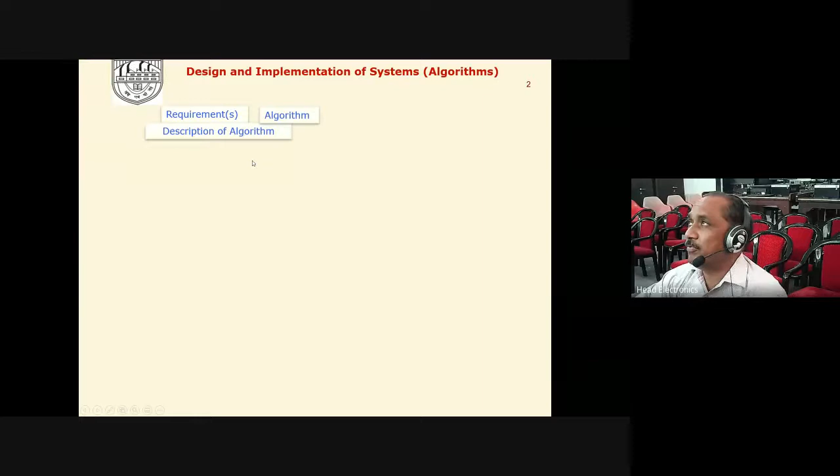So as we have described the four C's related to electronics, again there are four parameters that will be considered in order to analyze the performance of the system. The first step is the requirement, and requirements are always in ideal form, and from those requirements we will develop the algorithm or the concept. If it is more important to specify the functionality of the system or algorithm than the order and structure of the internal operations, then it is described using mathematical formulation, or mathematical modeling, and it is done at the higher level.

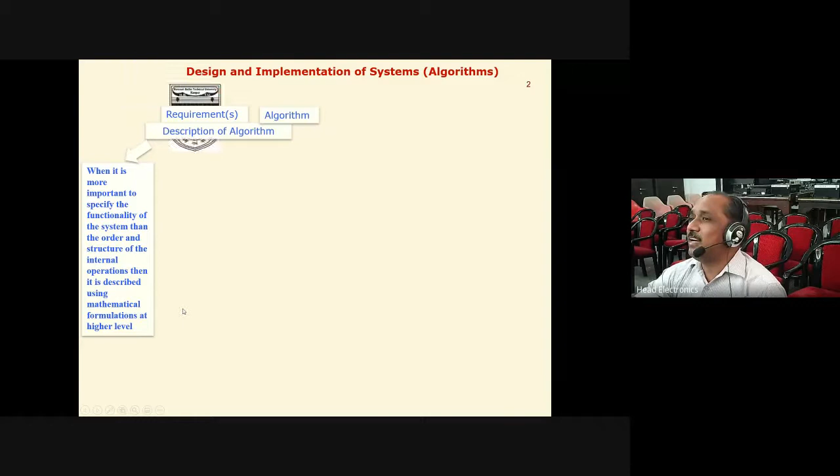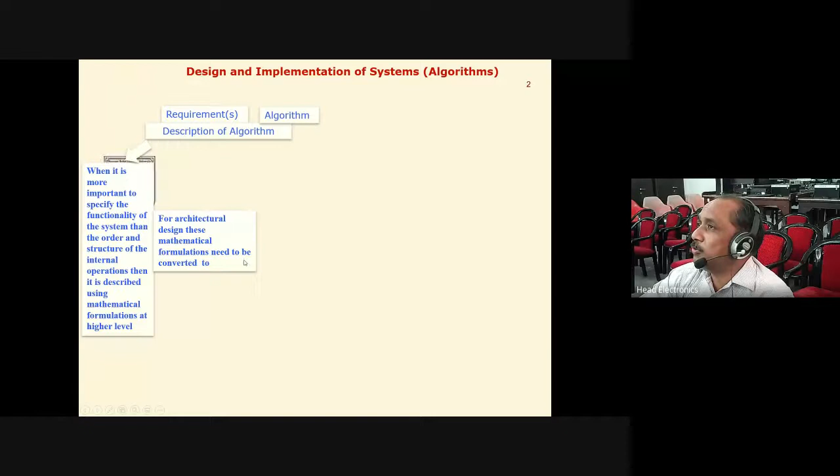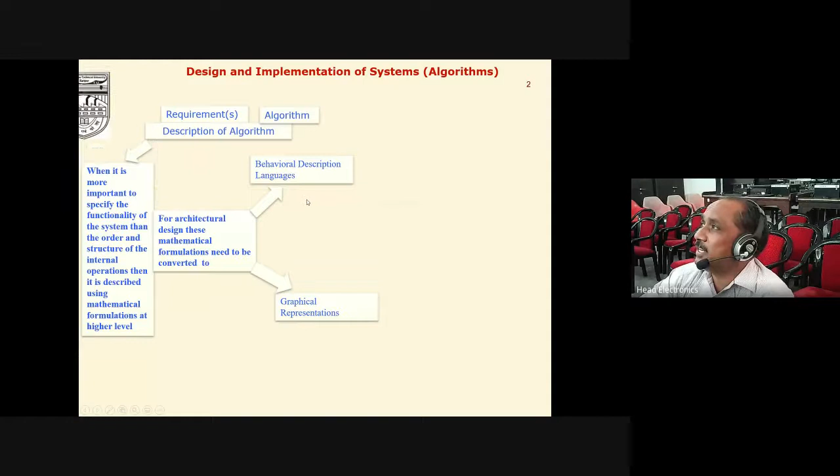But for the architectural design, these mathematical formulations need to be converted using behavioral description languages or graphical representation. Behavioral description languages can be categorized into three categories: prescriptive languages, descriptive languages, and applicative languages. A prescriptive language explicitly specifies the order of the assignment statements, and an example of this type of language is C.

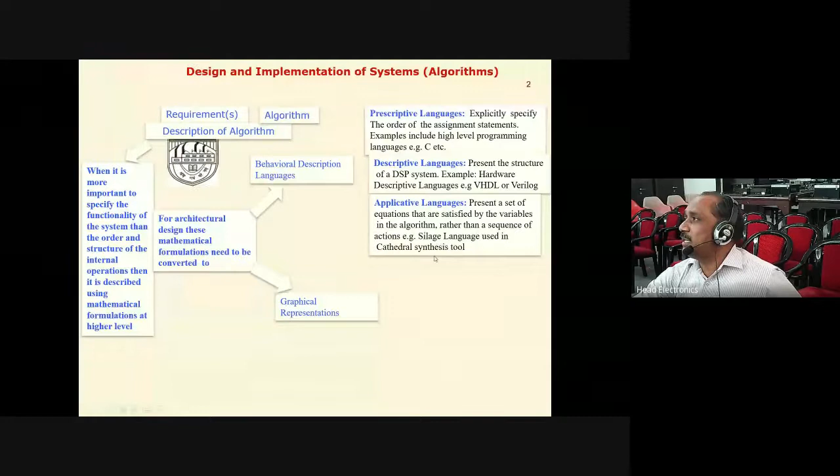Descriptive languages present the structure of the algorithm. For example, for a DSP algorithm, this will describe the structure of the DSP algorithm or system. For example, HDL, VHDL or Verilog fall under the category of descriptive languages. The third one is the applicative language. It presents a set of equations that are satisfied by the variables in the algorithm rather than a sequence of actions. For example, the Silage language is used in the Cathedral synthesis tool, or MATLAB may also be considered an applicative language.

Now, for the graphical representation, we can use different types of graphics. Why do we use graphical representation? Because graphical representations are efficient for investigating and analyzing data flow properties of DSP algorithms, and for exploiting inherent parallelism among different subtasks. Due to parallelism, the speed will be enhanced, and the power consumption will also be affected. And graphical representations can be used to map the DSP algorithm to hardware implementation.

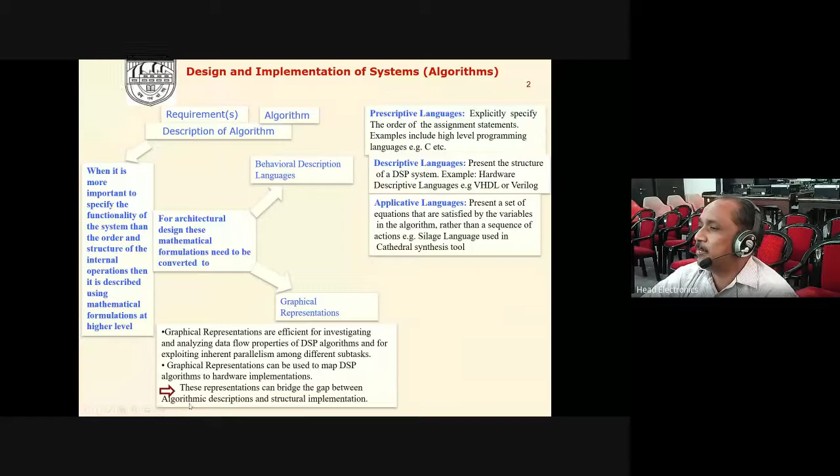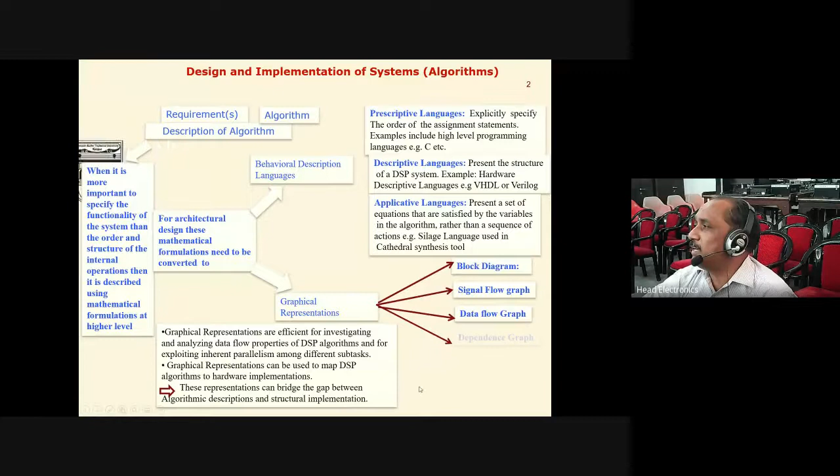The third point is that these representations can bridge the gap between algorithmic description and structural implementation, because there is a large gap between designing the algorithm and the implementation. For graphical representation, we can use the block diagram, which describes the hardware architecture. The signal flow graph gives information about the flow of the signal. The data flow graph describes one iteration of an algorithm, and the fourth one is the dependence graph, which describes the complete algorithm.

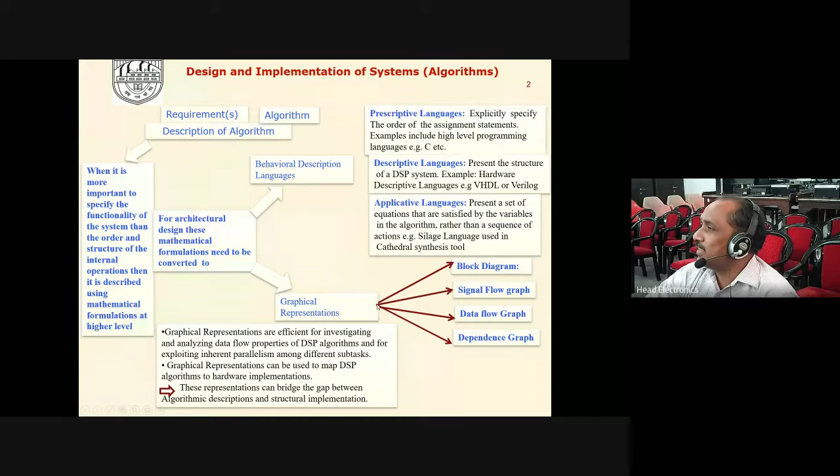So if we are interested in designing the system at the functional level, or functional modeling, then we can use the mathematical model. If we are interested in architectural design, then we can use either a behavioral description language or graphical representation. For behavioral description languages, we can use any one type or a combination of prescriptive, descriptive, or applicative languages. And for graphical representation, we can use any one type or a combination of the block diagram, signal flow graph, data flow graph, and dependence graph.

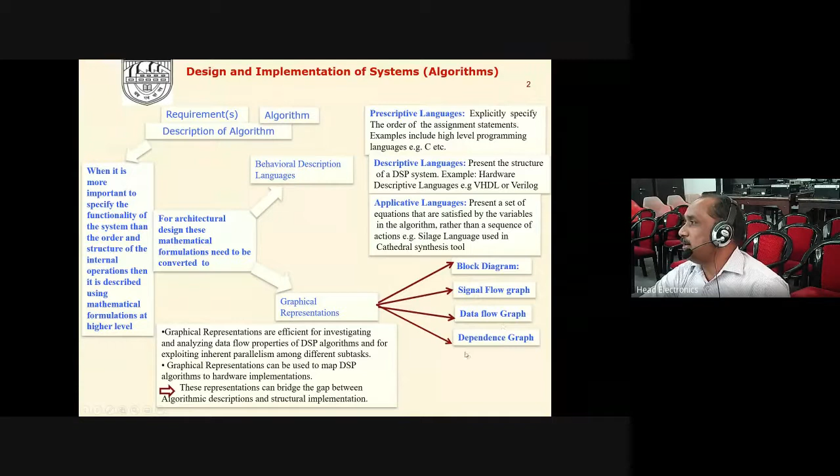Now here we are just going to cover a case study. For example, say we are interested in designing a system. First of all we will define the system. What is the system? What will be the nature of the system, whether it is an open loop system or a closed loop system? Then we will describe what effective methodology can be adopted in order to enhance the performance of the system. Effectiveness is again a function of the human skill, software, and the hardware.

So here we have to define the system, then we have to introduce the effectiveness of that system. After the definition of the system, this is the concept of developing the efficient algorithm. First the requirement will be given, and from the given requirement we will define our problem or the system, and then we will incorporate the concept of effectiveness. Then these requirements have to be converted into the specification using practical approaches or different types of algorithms that convert the requirement or the ideal concept into the specification. This is done in order to determine the parameters which have to be analyzed.

After conversion, we have to decide whether we are interested in the static system or the dynamic system. If we are interested in the static system, there will be no memory, and mathematically that can be represented only with the help of a polynomial or a set of polynomials. That may be a very simple equation or a very complex equation, linear or non-linear, but it has no memory. And the dynamic system has memory. Naturally, memory means it has the capability to contribute some additional features.

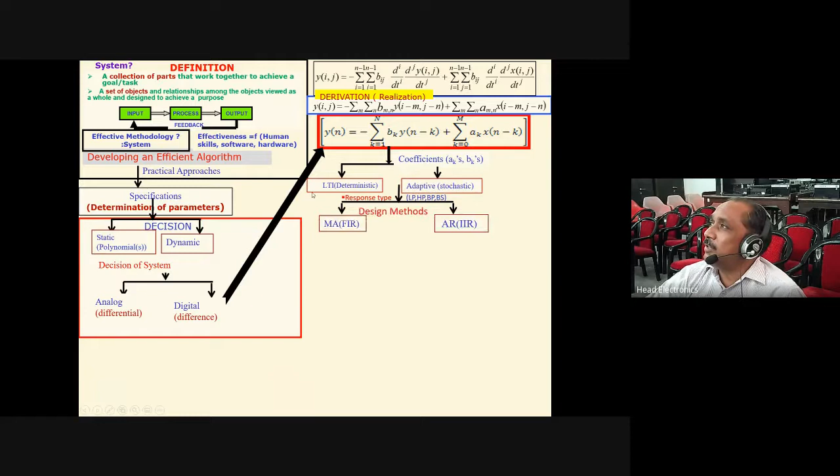Now, if we have derived the mathematical model on the basis of the definition, parameters and the decision, that is the type of the system, then we have to analyze the coefficients aks and bks, that is, the nature of the aks and bks. If the aks and bks are constant, not changing their values with respect to time, then they will be named as LTI, or deterministic equations, a deterministic system or algorithm. And if the aks and bks are changing their values with respect to time, then that will be known as the adaptive or stochastic system.

And what is the meaning of the aks and bks? The aks and bks describe the components of the system, and if the components of the system have the capability to change their value, it means we can change the performance of the system, or the system's performance will be changed as per the requirement, and it is named the adaptive or stochastic model or system. For example, if we are interested in analyzing echo or noise that is random in nature, then we have to select components which can change their values as per our need. Naturally, for the mathematical model, we have to consider that this is an adaptive or stochastic model for that purpose.

Now, if we consider the response type, whatever equations we have described are in the time domain, whether continuous time domain or discrete time domain. Now, for the complete analysis, they have to be transformed into the frequency domain also.

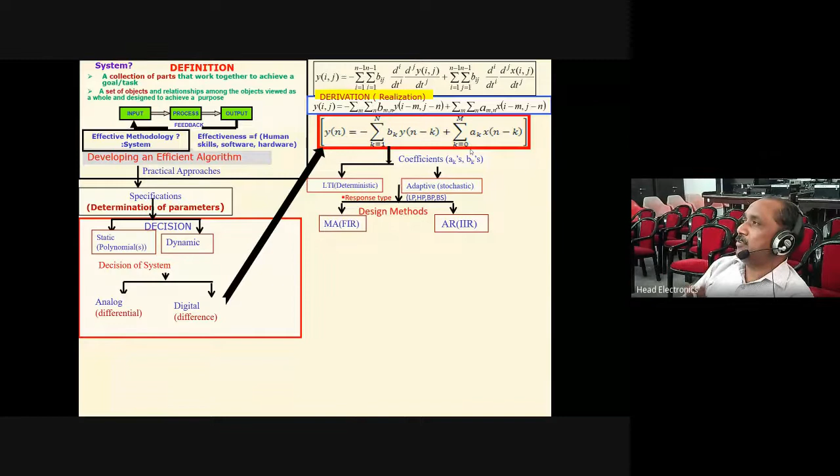And it has two sections. One is how the amplitude changes with respect to frequency, and the second one is how the phase changes with respect to frequency. In total, it is known as the frequency response of the system. And on the basis of the frequency response, we can describe the system as low pass, high pass, band pass, or band stop filter.

And again, if we see this equation, we will find it has two sections. One depends only upon the present input, and the second depends upon the previous output also. If it depends upon the previous output, it means it has feedback. If the system has feedback, it is known as the autoregressive model. And if the system has no feedback, it is named the moving average model.

And if this type of system is disturbed or excited by the worst case signal, for example, an impulse considered as input, then in the case of the system with no feedback, we will get the settled response after a certain duration. That is, after disturbances, we will get the settled response after certain duration or time.

But in the other case, if there is any feedback, whatever is the response will be automatically regressed, and we will never get the settled response, or we can say infinite duration is required. So the first one is known as the FIR, and the second one is known as the IIR system.

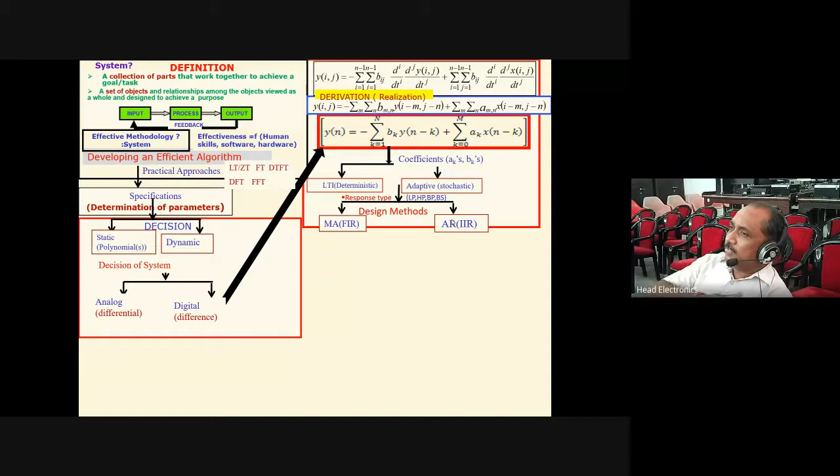And if we have applied this type of transformation by which we are getting the frequency response, then it is known as the Fourier transformation. That is, if s is replaced by j omega and z is replaced by e to the power j omega, it becomes the Fourier transformation of the signal or model. Now, if Fourier transformation is applied to discrete time signals or discrete time processing, the response will be the discrete time Fourier transformation.

But the discrete time Fourier transformation becomes a function of omega, that is a continuous function. For discrete processing, there is again a requirement of sampling or discretization. So when the discretization of the DTFT, or discrete time Fourier transformation, takes place, it is named the DFT. And in the DFT, we will find two special properties: symmetricity and periodicity. Due to the symmetricity and periodicity, we can reduce the number of computations, because the same types of multiplications and additions are taking place for other coefficients which are symmetrical or periodical.

If we reduce the number of computations, that is the addition and multiplication, it means the processing is fast. So this algorithm is named the fast Fourier transformation.

But whatever algorithm we are using for the purpose of analysis, Laplace transform, Z transformation, Fourier transformation, discrete time Fourier transformation, DFT or FFT, these are suitable only for the stationary signal. They are not suitable for the non-stationary signal.

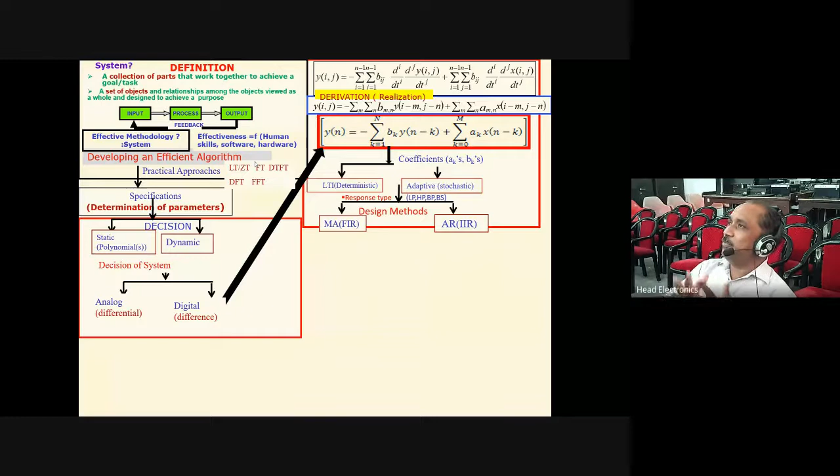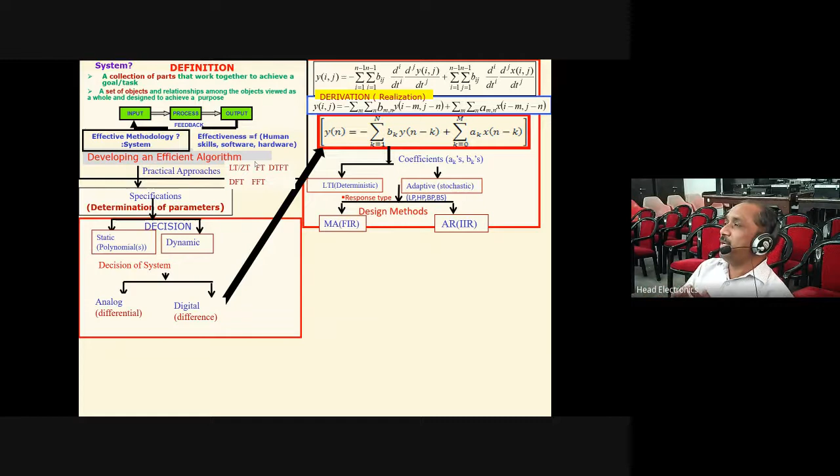For example, speech is a non-stationary signal, and these types of analysis or transformations are not suitable for this, because for a non-stationary signal we have to cover both the time domain and frequency domain simultaneously. But in either type of transformation described here, we can cover either the time domain or the frequency domain at a time, because they are inversely proportional to each other.

So for that purpose, the other types of approaches used are STFT, short time Fourier transformation, continuous wavelet transformation, or discrete wavelet transformation.

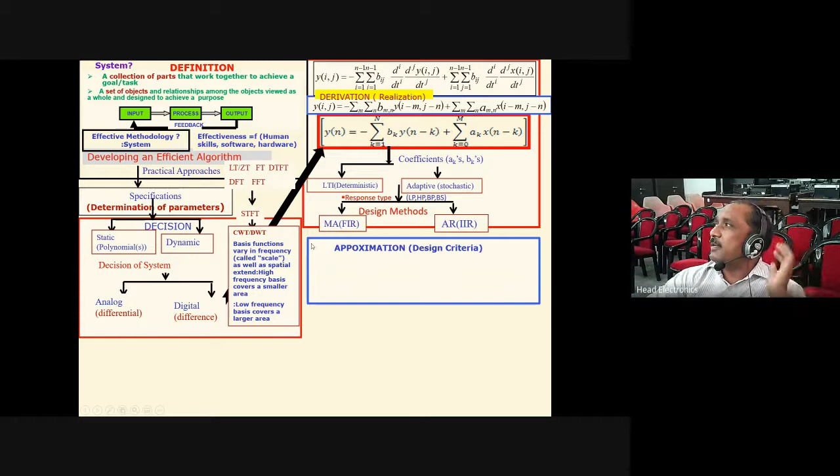Now after the analysis, that is what is the performance of the system, we have to select the design criteria, that is the approximation, and how the performance is analyzed.

For the analysis of the performance, we have to use the energy, that is power consumption - what is the amount of power consumption, what is the area required either on silicon wafer or memory space, and what is the speed or delay, or the finite word length effect.

For example, if we consider a diamond, then the diamond's value is decided on the basis of four C's - that is carat, cut, color, and clarity. Similarly, we can describe the value or performance of any system on the basis of four parameters - energy, area, speed or delay, and finite word length effect.

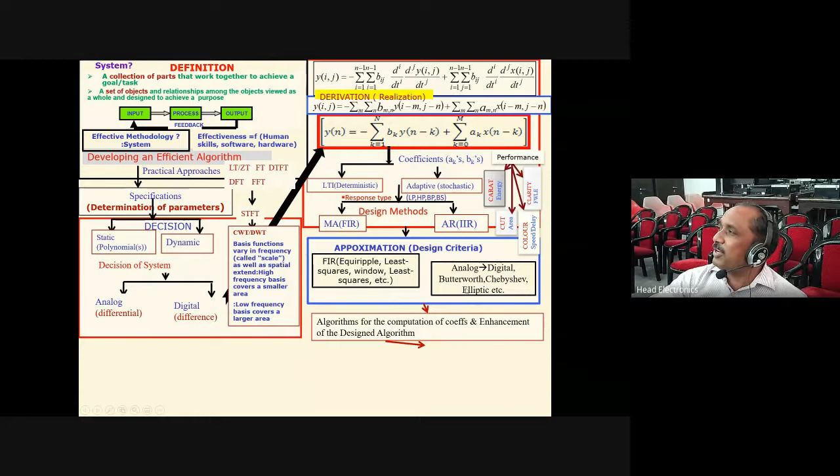Now after the analysis, we have to design the system, and for that purpose we select the design criteria. This design criteria is a type of approximation having different available algorithms, or we can also design our own algorithm in order to design the system. Then whatever algorithm we are designing, we have to compute the coefficients.

And for the purpose of enhancement of the designed algorithm, we have to again utilize pipelining, parallel processing, folding and unfolding. There are so many types of techniques that can be used to enhance the performance of the algorithm.

Now if we see, we can say whatever we are discussing here, information from one domain has been transformed to another domain, but it is not true, because during the transformation or analog to digital processing, in the analog domain, how many bits are required? Approximately or exactly infinite number of bits are required in order to convert the complete information from one domain to another domain, but it is not practically possible.

So in order to make it feasible, there is a need of finite word length effect, finite word length. And due to this finite word length, there will be a quantization error, and we have to analyze the finite word length effect.

Now, how does the finite word length take place? For that purpose, we have to use quantization, and then we have to analyze whether the quantized algorithm is suitable, whether the quantized algorithm's output is in the permissible range or not.

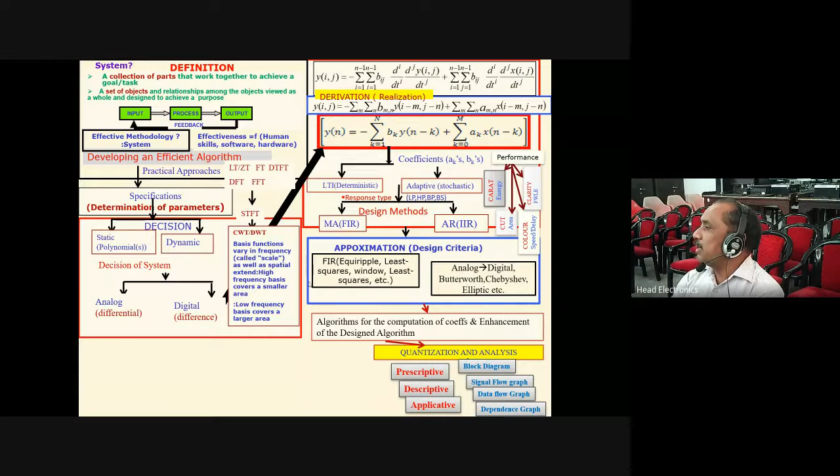And again, for the purpose of this quantization, designing, and analysis, we can use different types of languages - that is prescriptive, descriptive, or applicative languages - or we can use different types of graphical representation, that is block diagram representation, signal flow graph, data flow graph, and dependence graph. Now after this, the next step is the implementation.

And before the implementation, let's see what we have done. First, in the first step, we have to understand the application problem. Then in the second step, we have to design the algorithm according to our requirement. Then the designed algorithm has to be converted into a VLSI implementable form of the algorithm, and efficiency has to be incorporated as per the requirement. Then the implementation will be done either using the hardware approach or the software approach.

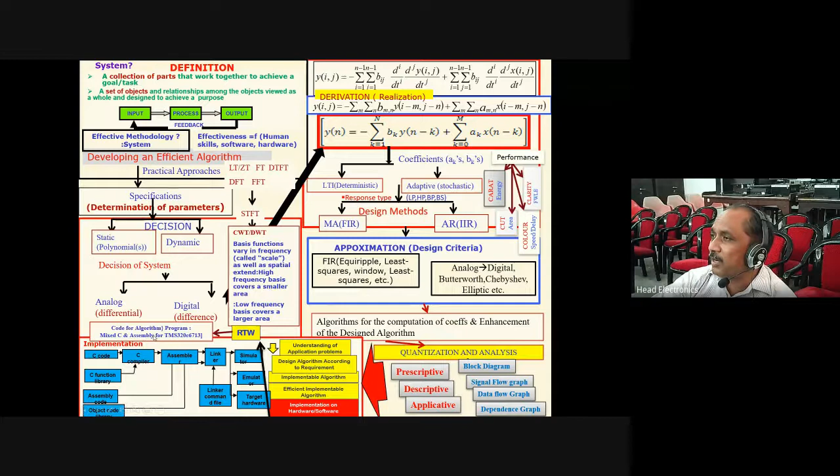For example, say we have designed an algorithm that has to be downloaded on a given hardware in order to test its performance. Say we are using the Code Composer Studio as the interface between the hardware, that is the target, and the designed algorithm. It has different sections like the compiler, assembler, linker, and loader, and whatever is the algorithm will be written in the C file, or using the C code. That will be converted into the .c file, and then the .c file will be considered by the compiler. Its output will be the .asm file, and the assembler's output will be .obj, and then the linker's output will be the .out or the .bin file that can be used for simulation, emulation, and hardware target purposes.

Now, suppose we are just taking an example. There may be different levels of the audience. There may be some students from first year, second year, third year, and there may be some researchers, PG students. There are also some respectable faculty members who are well known and well aware of all the concepts of designing and implementation. So we are just trying to discuss here the concepts of the design and implementation of the VLSI system.

And we are trying to discuss this concept in the field of DSP. Now, suppose in DSP, that is digital signal processing, we are interested in designing a filter. So if we design a filter, it means we will get a mathematical model or an algorithm. For example, say this filter has to be designed. We are not going in detail into the methods or approximations which we have described here.

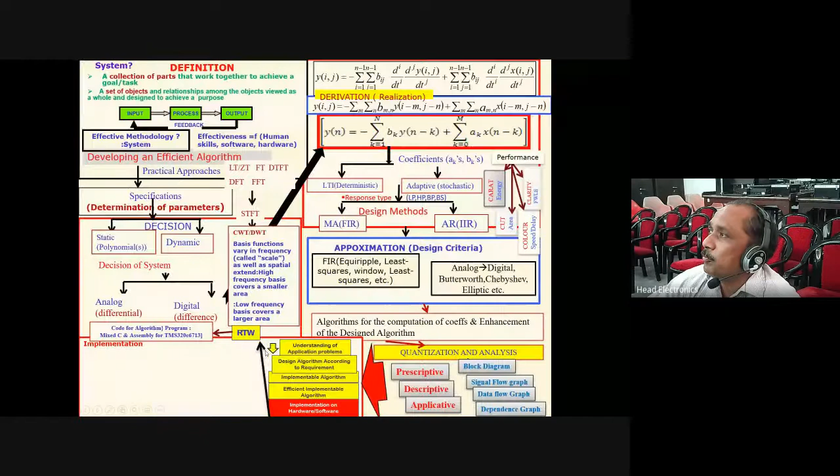Say we are just coming to the point here, that for the purpose of designing, we have to use approximation, that is the different criteria here, the design criteria. Now suppose we have selected one criteria in order to design this filter, and say this is the low pass FIR filter, and we are using a method known as the window method.

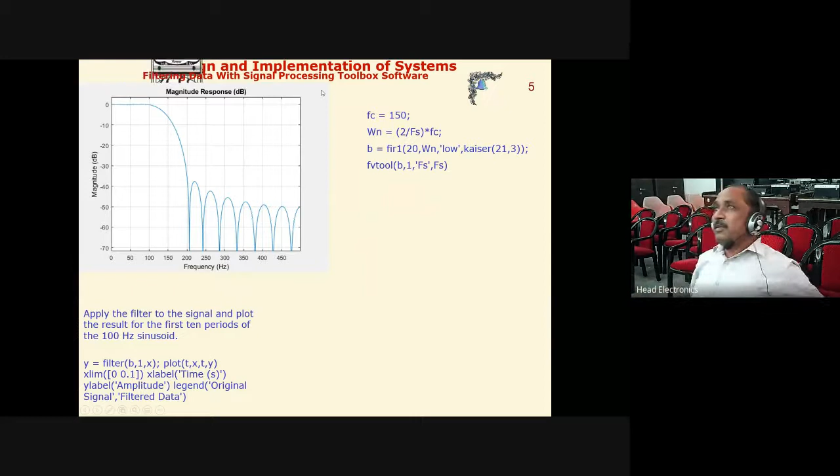Now suppose we have used this method and written the MATLAB code for it, and we have designed the low pass filter using windows. So there are sideband ripples here. Now if we see the ideal response of any low pass filter, it has a smooth curve in the pass band as well as in the stop band, and the transition bandwidth is zero in the ideal filter.

But it is not practical or feasible to design any such filter. So we have to consider ripples either in the pass band or ripples in the stop band, and there may be a transition band gap between the pass band and the stop band. So now, depending upon the different characteristics, different approximation methods are developed for the purpose of designing the algorithm.

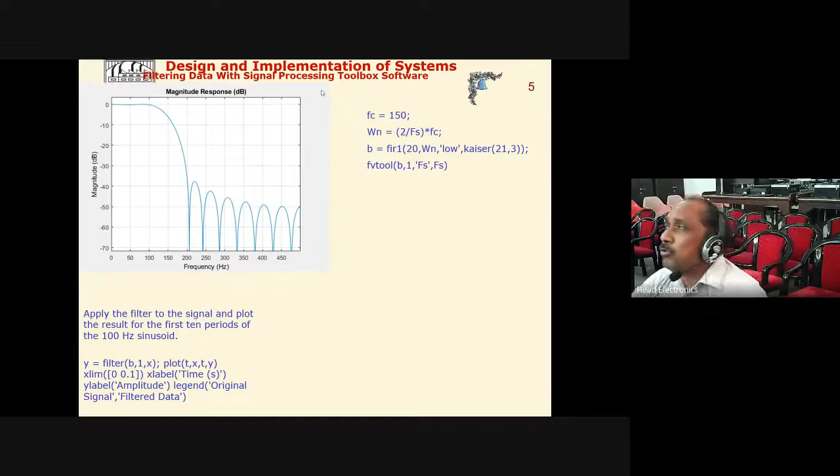For example, there are the Butterworth approximation, Chebyshev 1, Chebyshev 2, and the elliptic approximation. These are the different approximation methods. Now using these different approximations, we can get different types of designed filters. So once this filter is designed, we have to test its performance by applying some signal. We give the input signal, and then we check whether the signal is filtered as per the requirement or not.

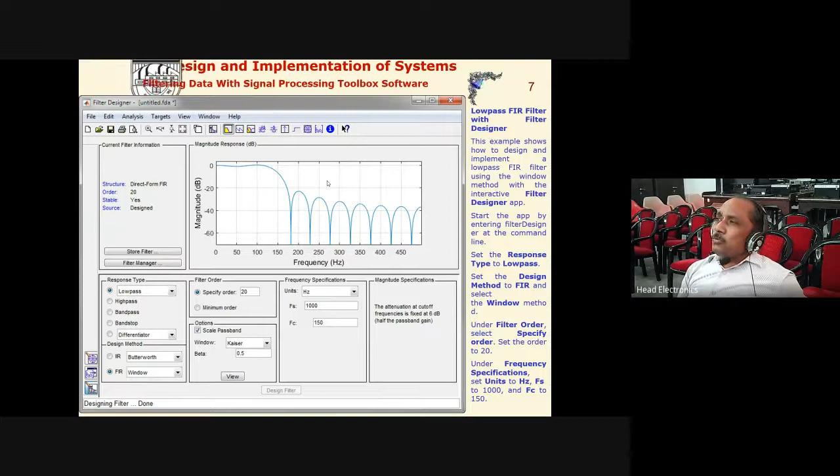Now, the filtering of the data is described here, and there is a second method: one is we can use the code, and the second is there are MATLAB tools which can be used in order to design a filter. For example, there is an FDA tool, the filter design and analysis tool. In order to utilize the filter design and analysis tool, you just write 'FDA tool' and press the enter button in MATLAB.

When you press the enter button after typing FDA tool, a dialog box will open, and in the dialog box we have to select these parameters: what should be the response type, low pass or high pass. If low pass, then what method has to be used, then the design method, IIR or FIR. In the IIR case, there are different approximation methods, and FIR has another set of approximation methods.

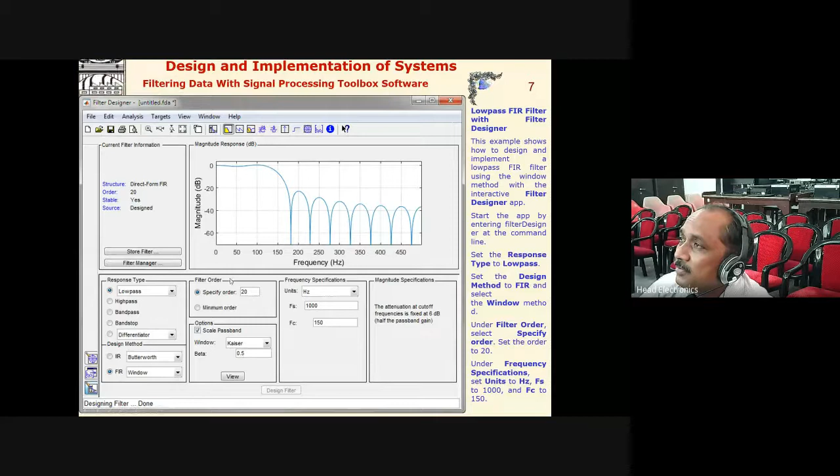We have to define the filter order, whether we are interested in a particular order or we are interested to design a filter for the minimum order. Then options are given for the windows, which window has to be selected, and we can see the amplitude and phase response of the selected window.

Then frequency specification means what is the passband frequency, what is the stopband frequency, what are the values of the ripples in the passband, what are the values of the ripples in the stopband. Or we can also select what will be the sampling frequency and the cutoff frequency here.

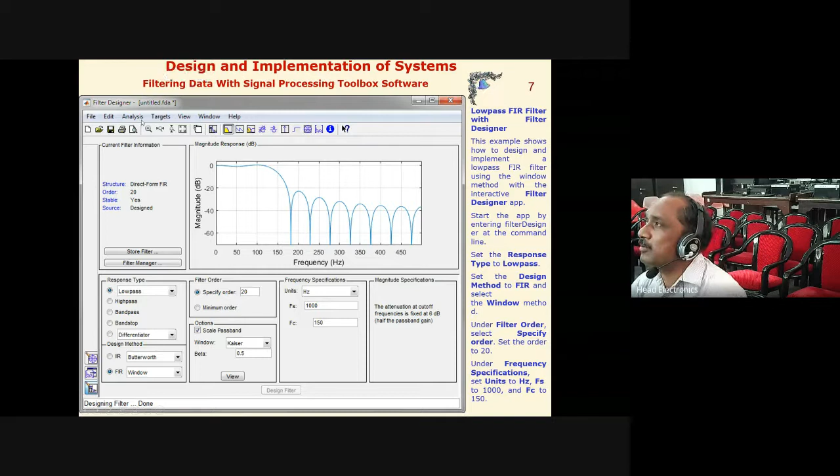After the selection of these parameters, we have to select design filter. When we click on design filter, the filter will be designed, and we can analyze the different performances of this designed filter using the analysis, having the amplitude response, phase response, amplitude and phase both, pole zero plot, and the equation numerator and denominator. We can analyze other related parameters using the analysis here.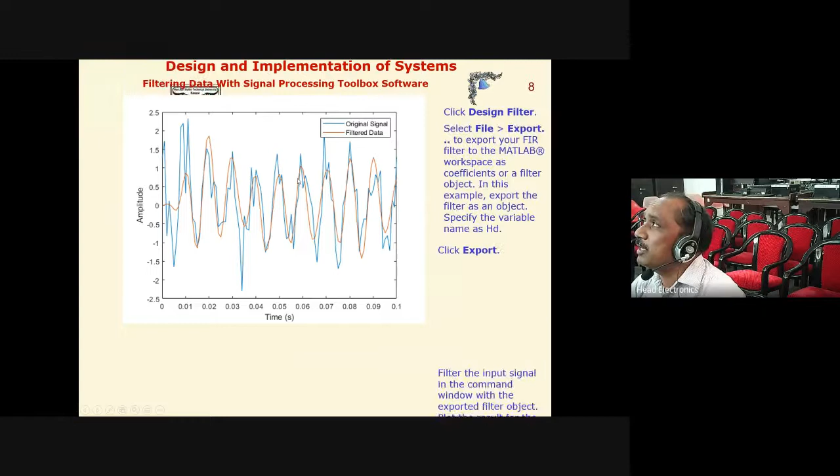Now this can be also tested by applying here the signal. Suppose we have designed the signal. This is the concept that describes a gap between the ideal filter and the practical filter here.

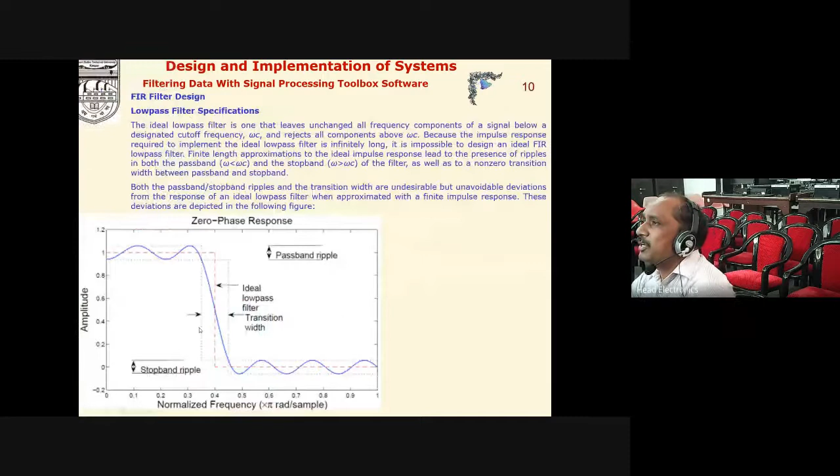Now coming to the point, if we have designed the filter, it will be better to discuss this also. If we are interested to design a low pass filter, ideally this is a low pass filter which we generally use to describe in theoretical concept. But we have to incorporate the ripples in the passband, ripples in the stopband, and ideally the transition band is 0 here, but there should be a gap, transition width, in order to design the filter.

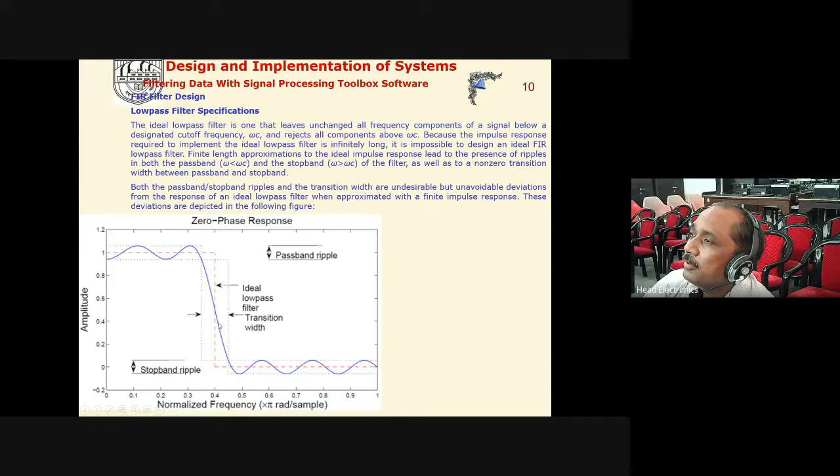So if we see, we'll find 3 parameters we have incorporated by applying the practical approaches: ripples in the passband, ripples in the stopband, and the transition width. These 3 points can be considered as the 3 angles of a triangle: filter order, transition width, and the peak passband and stopband ripples.

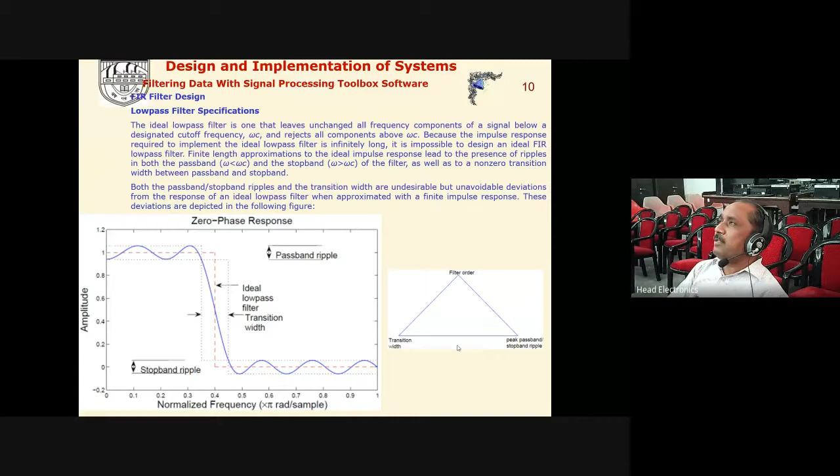If we are interested in modifying any one parameter, then accordingly the other 2 parameters will be modified. So if we introduce any type of improvement in a particular parameter, naturally the other related parameters will be affected by that modification. We will get some advantage or achievement of the system on the basis of compromise with other parameters.

Suppose we have designed any algorithm. Now coming to the concept of today's lecture: using any method, whatever may be the method, there are so many methods which we are representing here, using any method we can design the filter. Suppose we have designed the filter, then naturally an algorithm will be developed, and we can design using many methods and compare them.

Suppose the target is given as the TMS320C6713 DSP processor, that is 225 megahertz. So in order to interact with the real world, another here the interfaces and other devices are used here.

So in order to interact with the real world, we can use three modes of communication of the digital signal processor to the real world. One is analog to analog, input and output. For this one, the analog input is considered as input, and after processing, whatever is the digital output, that will be converted again into analog form. So this is the analog mode of communication.

Now, say we are interested in creating a DSP system. First the theoretical concepts will be developed, then the mathematical model or the functional description will be described, and we will design a system as we have described in the previous PPT. That is, we will design the system either using code, or we can use a toolbox or other software or packages, and then we will get a model as per our requirement, and that model may be given by a mathematical equation. Say this is the difference equation here.

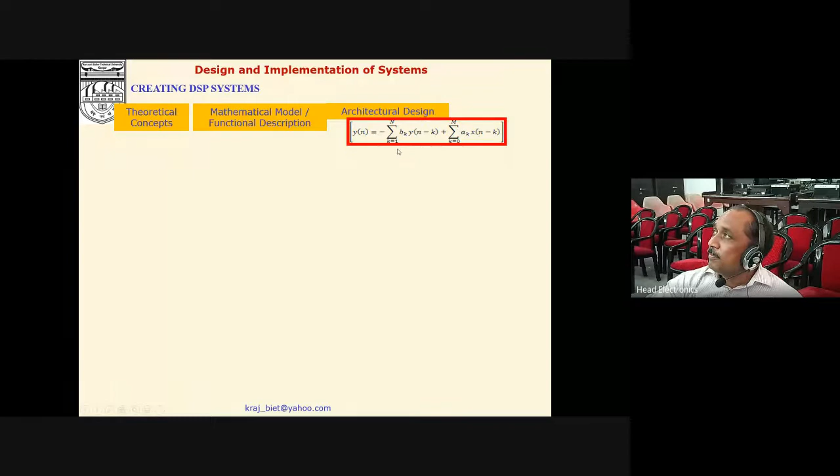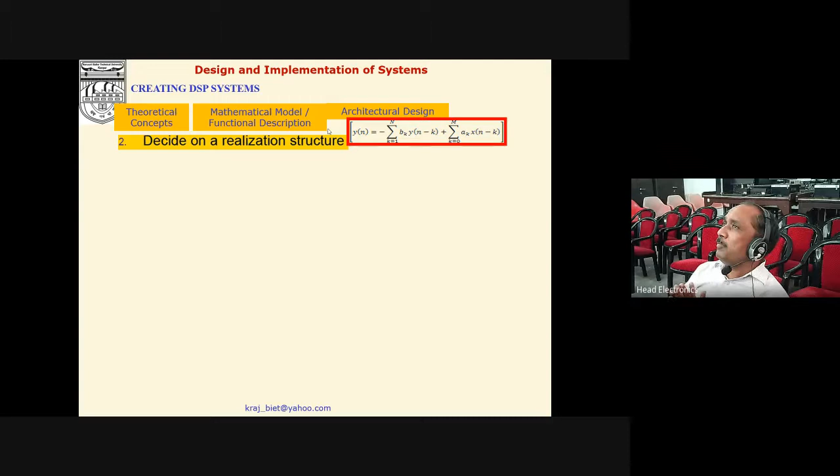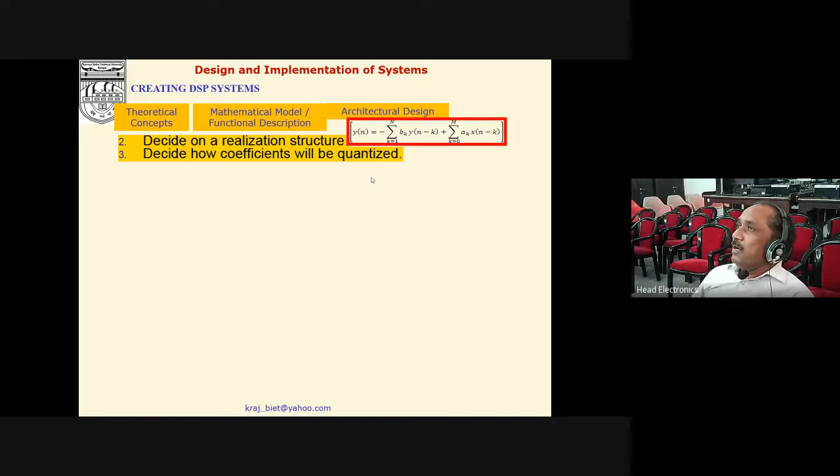Now in order to design the system, this mathematical model may be represented in a number of realization ways, having different types of architecture. So we have to decide a realization structure which is suitable on the basis of performance, and then we will decide how the coefficients will be quantized, because these coefficients are assumed to have infinite precision, but it is not true. So as we have discussed in the previous PPTs, we have to quantize them, and after quantization we will get the quantized coefficients, and next is to compute the quantized coefficients. What are the values of the quantized coefficients?

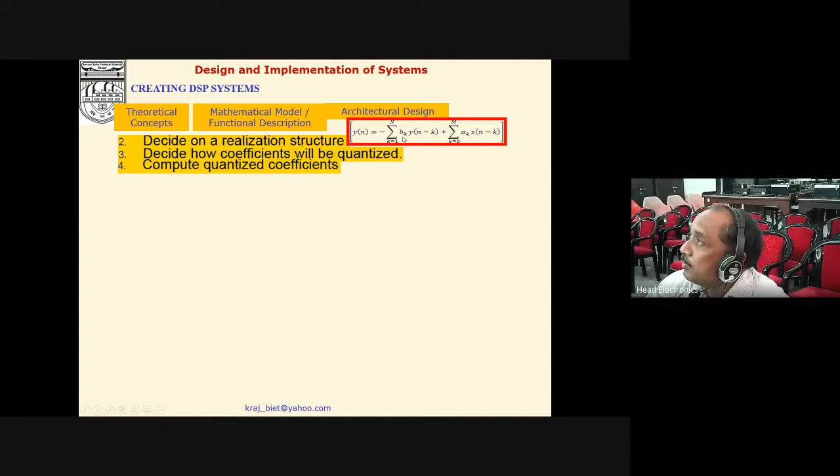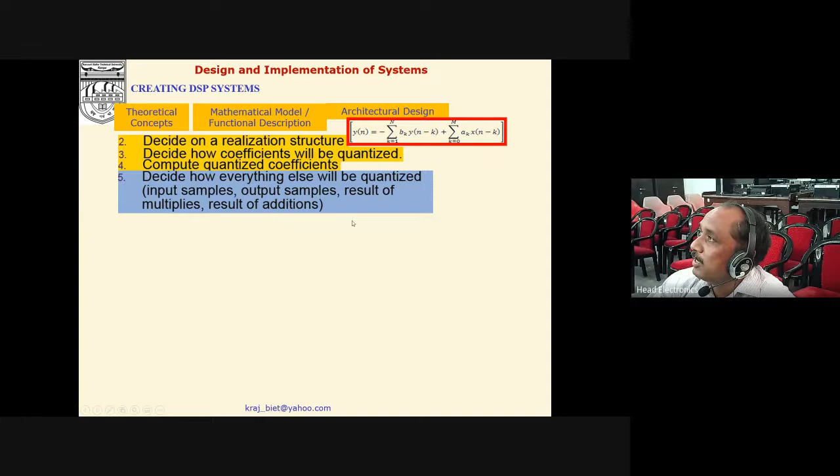If the coefficients are quantized, then naturally the processing as well as the pole-zero locations etc. will be changed or modified, and we have to decide how everything else will be quantized, because now the input samples will be quantized, output samples will be quantized, and the results of the multipliers and the results of the additions will also be quantized. And what will be the quantization process?

So in order to decide the quantization process, we have to select the mode of quantization, whether we are interested in fixed mode, float mode, double mode, or single mode, and which rounding mode has to be selected: ceil, convergent, fix, floor, or round. Then we have to decide the overflow mode, that is saturation or wrap, and then we have to select the data format. There are two types of data: one is the fixed point number representation, and the second one is the floating point number representation.

And depending upon the type of the selection of the number system, whether we are interested in the fixed point or the floating point, we have to select the data format. For example, if we are using the fixed point, that is the Qm.n format, then we have to define the total word length, described by capital N, and the number of bits used for the integer representation and the fractional representation.

Similarly, in order to represent the exponent and the mantissa, we have to define the number of exponent bits, and this is the total word length here. Now we get four types of mode: fixed, float, double, and single. Fixed means we are using the Qm.n format, and the total word length will become m plus n plus 1, because the most significant bit is used for the sign bit. Floating selection has two criteria: either defined by the user, or we use the standard, the IEEE 754 standard.

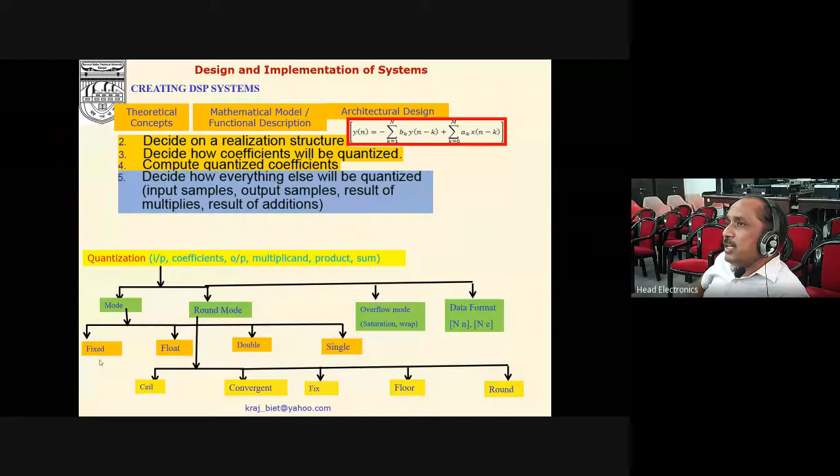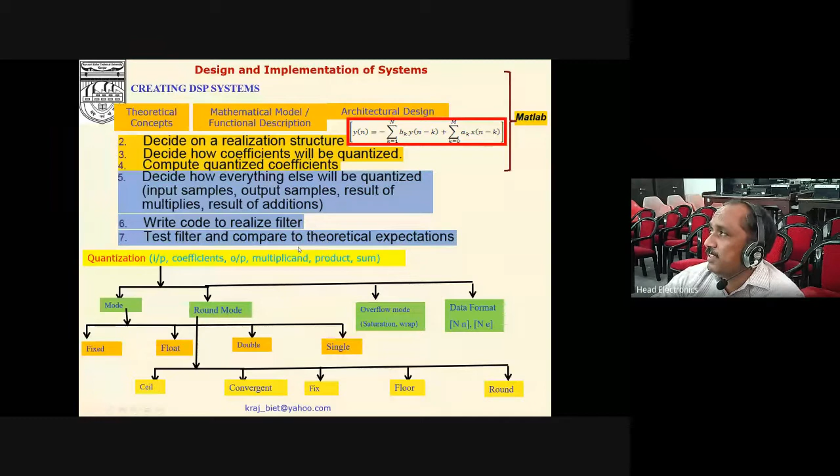If we are using only the user defined format, then we can use the float command. Otherwise we can select single and double for single precision and double precision respectively. And these are the rounding modes: ceil, convergent, fix, floor, and round. Then accordingly we will write the code, design and test the filter, and compare to theoretical expectations. This can be done using MATLAB coding and CCS, the Code Composer Studio, which is the interface between the designed algorithm and the target.

So as we described in the previous slide, suppose this is the model which we have selected. After designing, we are satisfied with the performance of this algorithm. Now, after the design, we have to analyze the performance of this system. That means we have to analyze the energy or power consumption associated with this algorithm, the area required to implement it on the silicon wafer or the memory space required, and the speed or delay related to the execution of the system.

And the fourth one is the finite word length effect, that is, the effect of finite precision. So on the basis of these four parameters, we have to compare the performances, and if we are satisfied with the performance, it's okay. Otherwise, we can enhance the performance again. We can enhance the algorithm by using different types of architecture, that is architectural level design, using pipelining, parallel processing, folding, unfolding, etc.

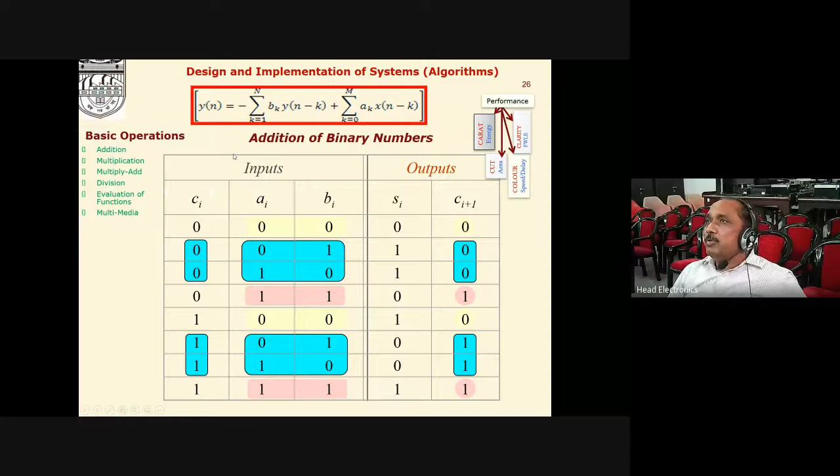And the second one is that there are different operations involved in the algorithm: addition, multiplication, multiply-add, division, evaluation of functions, and so on.

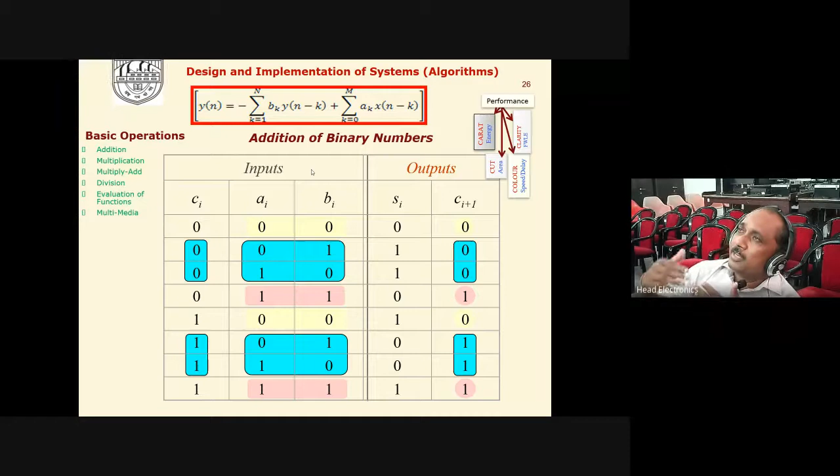Now, if we enhance any one operation or any one type of processing, addition, multiplication, multiply-add, division, then we can enhance the performance of the total algorithm, right? So suppose for example we consider the first one, addition, and we are interested in enhancing the performance of the addition. So we will consider the concept of the addition of binary numbers, which we have gone through in the first and second year. Nowadays these topics are covered in high school and intermediate also.

If we consider the set of inputs, then accordingly we find the output, and we can find the representation of the addition. And we will find the carry propagates when there is a combination like 0 0 1 or 0 1 0. That is, if there is a combination of 0 1 or 1 0 for the inputs, and Ci is either 0 or 1, then a carry propagates.

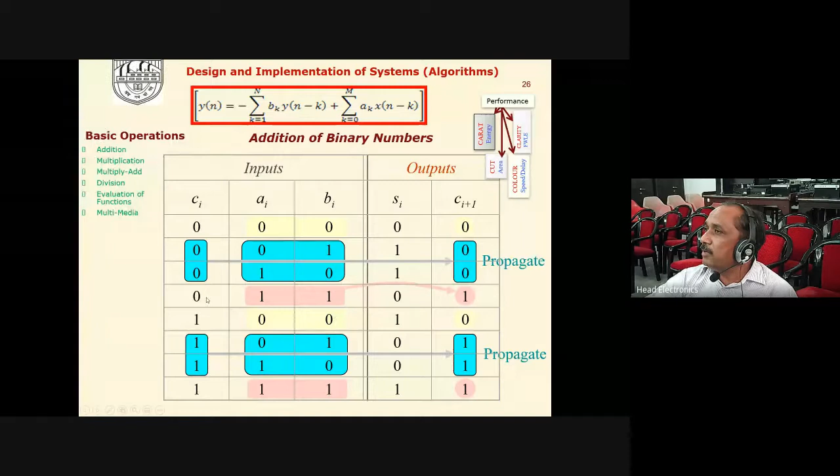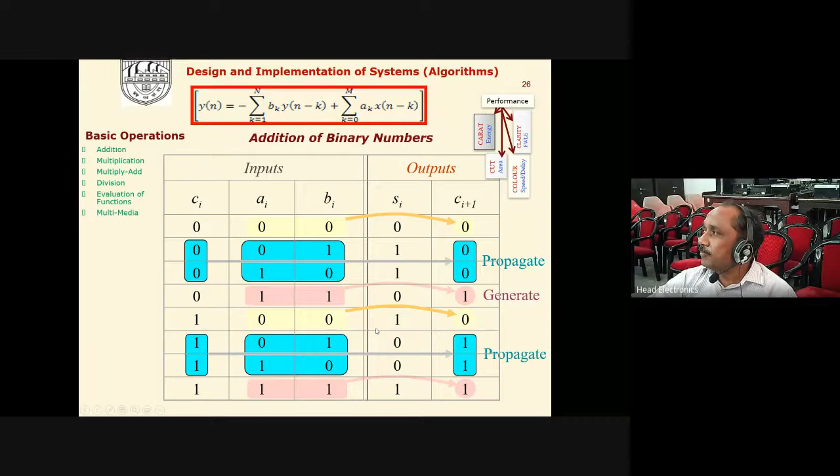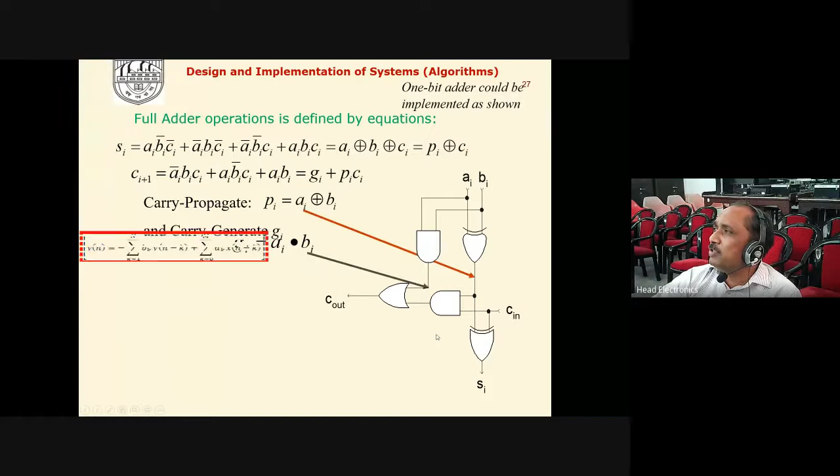And suppose we are interested in enhancing the performance of this system; then for the purpose of the enhancement of this addition or this adder, we can introduce here the multiplexer. And again, to enhance the performance of this set of adders, suppose this is the adder one that is suitable for a 1 bit adder, and these are arranged in such a manner that we can add the 4 bits simultaneously. Then if we analyze, we will find that the delay or the propagation delay related to this concept is linearly proportional to n, that is the word length here.

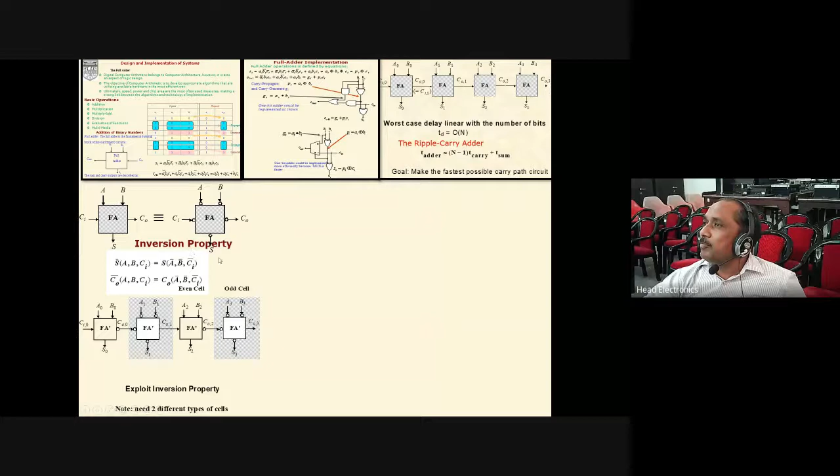And the total addition time will become here n minus 1 times the carry plus whatever is the time of the summation here, because the carry will propagate from the LSB to the MSB. Now here it is named as the ripple carry adder, and in order to enhance the performance, we can include the inversion property. And after the inversion property, again if we analyze here the critical path length, that is what is the total length and how this can be minimized. This is the critical path length, and we can minimize this length also here.

Now another concept is the Manchester series or the Manchester carry chain, which is utilized to reduce the critical path length or to reduce the propagation delay. And there are other methods to enhance the performance, like the block addition method, that is the variable block adder, or the carry look ahead adder, or the carry completion adder, or the Brent Kung adder. There are so many methods that can be used here, but there will be delay, that is the propagation delay will exist. Even if we are trying to reduce the propagation delay, it will exist here.

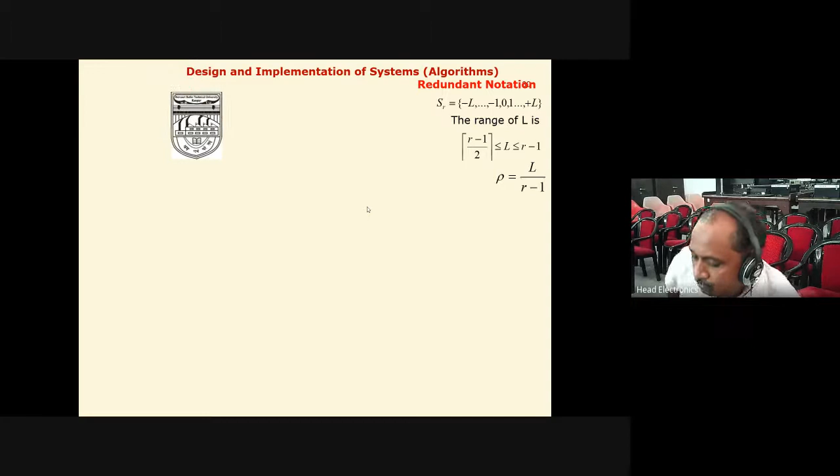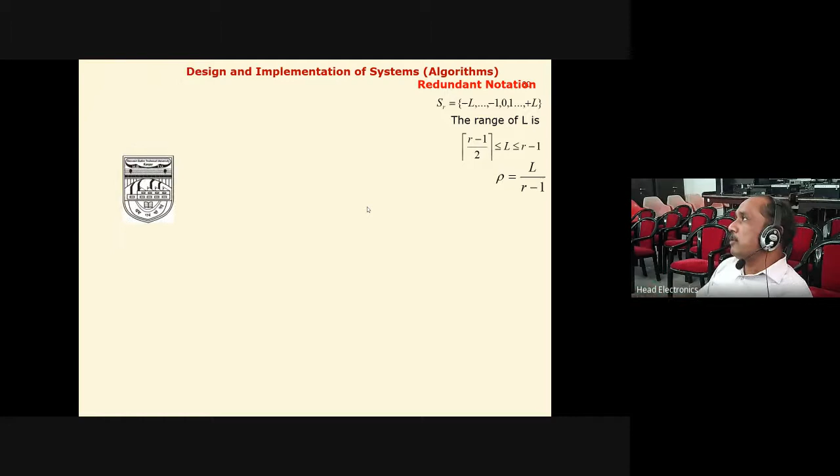So now hypothetically we assume that we are interested in eliminating the carry propagation. How can it be done? If carry is not generated, then naturally it will not be propagated here. So the reason for the generation of the carry is its additive nature, because we are using only two bits, one is 0 and the second one is 1. Both have a positive nature. Now, hypothetically we assume that if we add here the third bit, that is -1, then we will get the set of three bits, that is -1, 0, and 1.

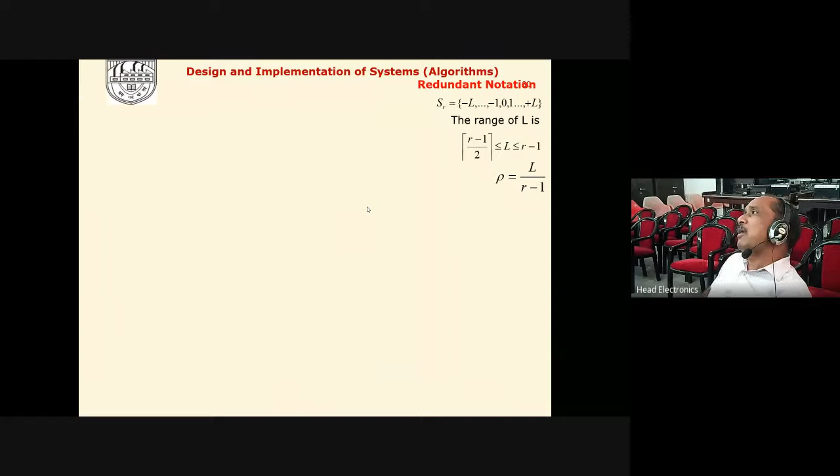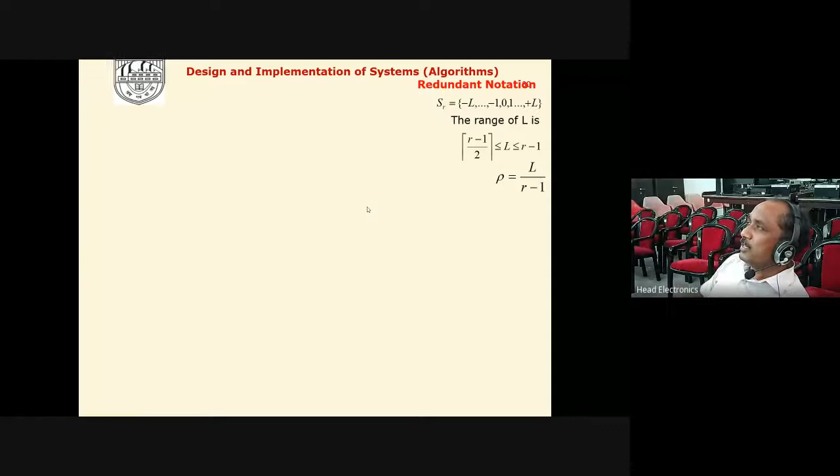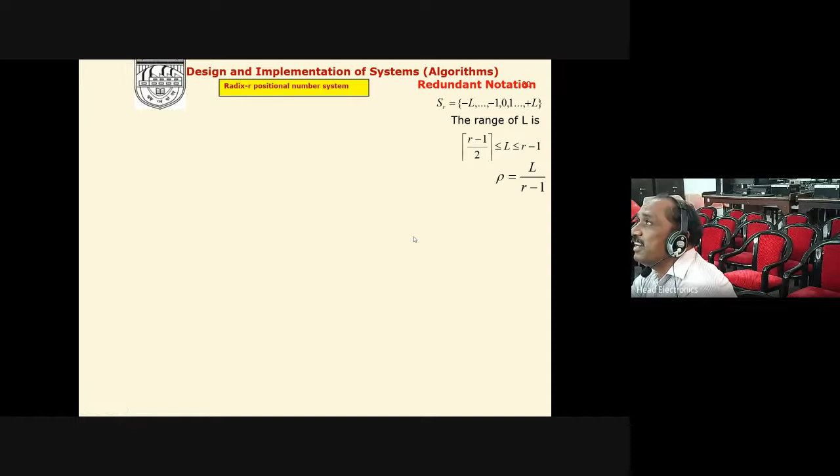And now how will they be generated? They can be generated by using a combination of 0 and 1, either using LSB minus MSB or MSB minus LSB. Then we will find that during the generation of the carry, if there is a possibility to generate the carry, then due to the -1, that will be eliminated here. So what will happen? In addition there will be no propagation of the carry, so it will become very fast.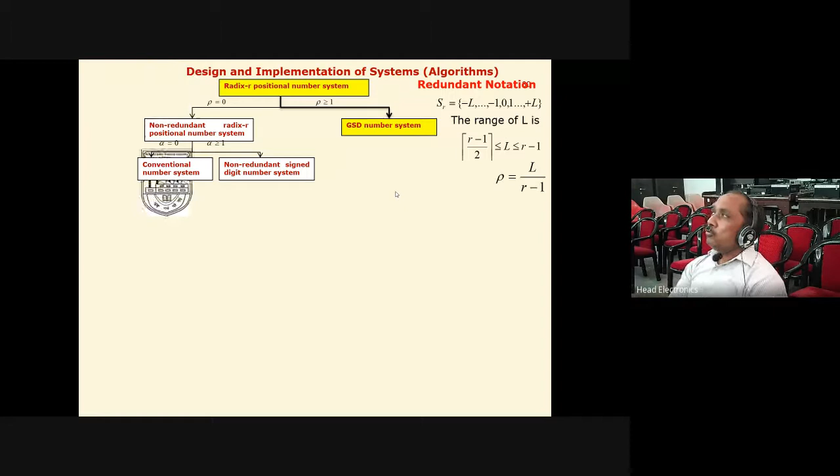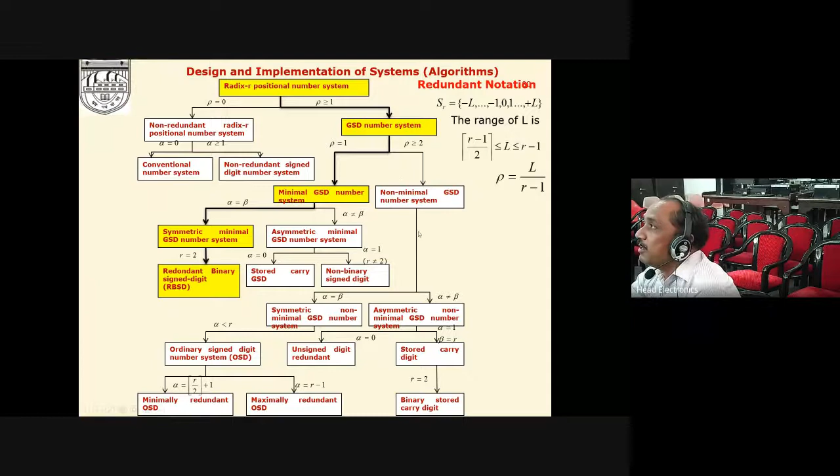If we use this type of arrangement, that is using the negative concept, suppose we want to write 8, then it can be written using the traditional method, or we can write it as 9 minus 1, 10 minus 2, 11 minus 3. There are so many methods. So it is named as the redundant binary signed digit representation. But the drawback is that we are using a combination of bits, and due to the combination of bits, the speed is very fast, but at the same time the area is also larger. So in a traditional adder the speed is slower, but the area is also low. Here we are getting higher speed, but at the cost of area.

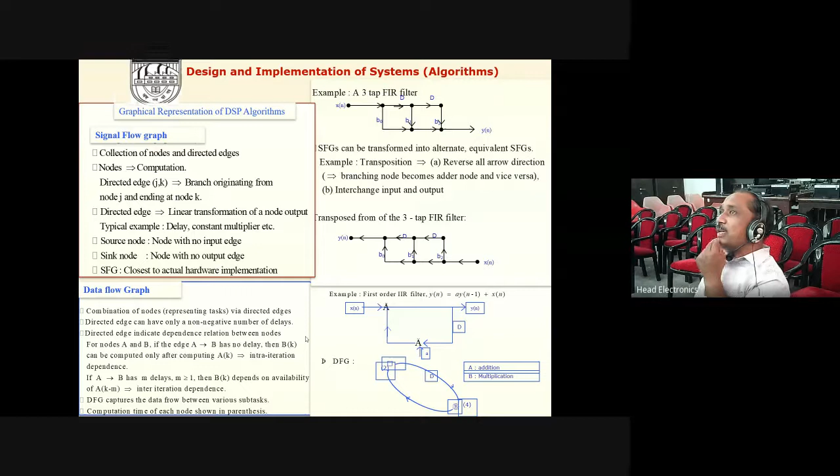So if we compare the performances of the carry ripple adder, carry completion adder, carry save adder, and the RBSD adder, then naturally the RBSD adder has very high efficiency, but it has the drawback. So now we can come to another concept, that is we can consider the combination of this traditional method and RBSD, and this is known as hybridization. And after hybridization, we can also optimize the algorithm and compare the performances here. So this is at the level of the number system. Now again, we are going to describe some concepts at the level of the architecture. So in order to describe the enhancement of the algorithm at the level of the architecture, the algorithm is described.

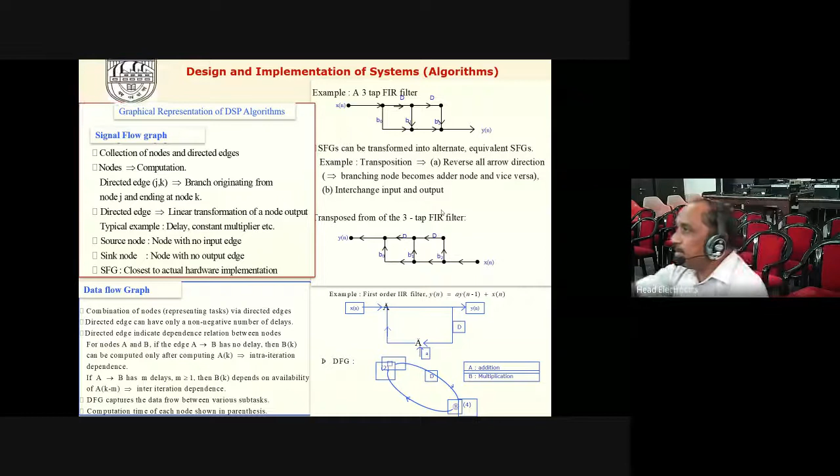Here, if we are interested in enhancing the performance of the designed algorithm at the architecture level, then that algorithm will be described with the help of the DFG, data flow graph, used for one iteration. And in that DFG, we can use pipelining, parallel processing, timing, retiming, folding, and unfolding in order to enhance the performance. I'm just describing the concept of this one.

Here, for example, here time is over. Huh? Okay, just concluding. So I have to conclude it.

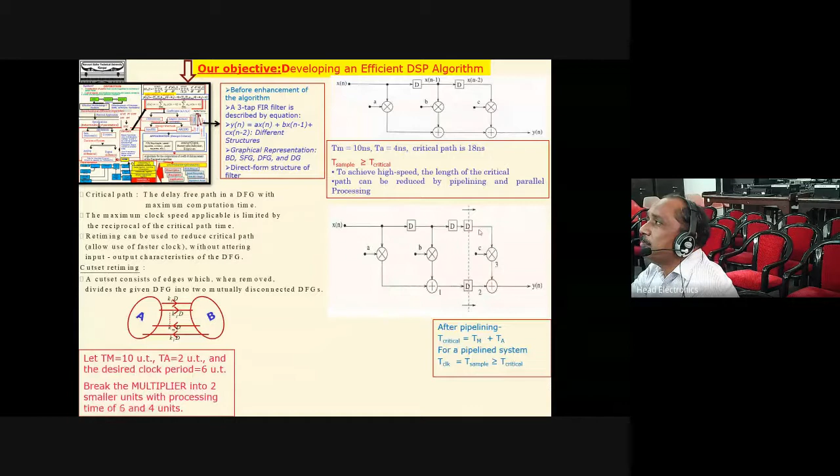But here we can utilize these concepts to enhance the algorithm at the architectural level. Now, as we have described, if we use different levels of pipelining and parallel processing, then speed will be very high. Another one is that we can use different efforts towards developing algorithms for efficient implementation of the FIR filter on ASIC and FPGA.

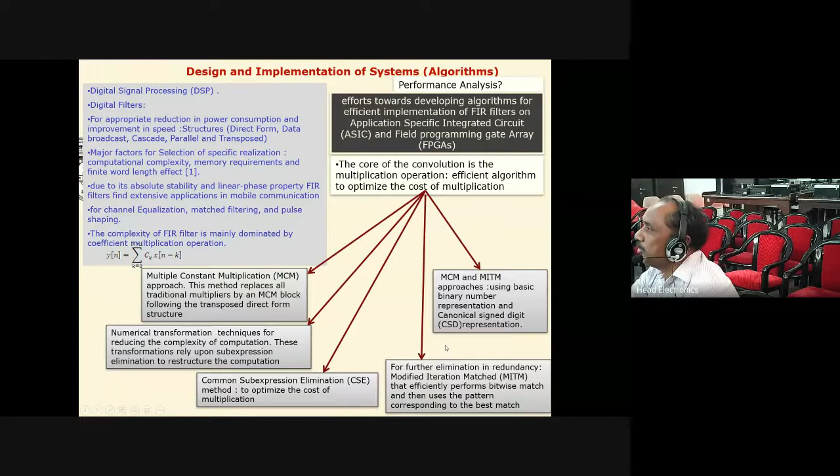Here the convolution is the core function. The convolution can be enhanced by using the MCM algorithm, that is the multiple constant multiplication approach. The next ones are numerical transformation techniques and the common subexpression elimination method. Further elimination of redundancy can be done using the iteration method, or we can use a combination of MCM and MITM. So these are some concepts describing how we can enhance the performance.

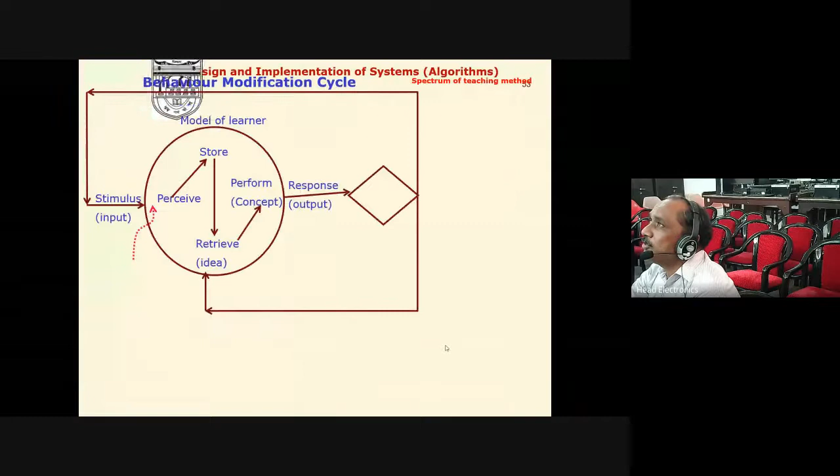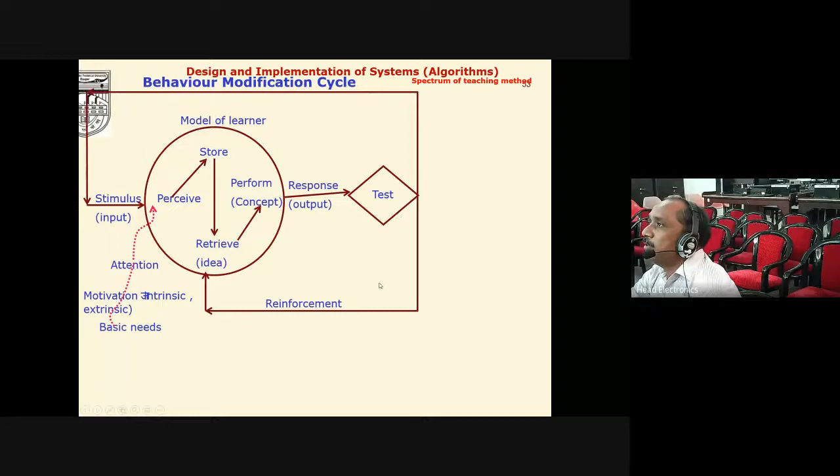And why are we discussing this? Naturally, in order to modify the behavior of the cycle. What we perceive from society, we try to store so that we can retrieve it at the time of requirement, and when we are in a position to retrieve it, it becomes the idea. If we are able to perform something on the basis of this idea, it becomes the concept. Whatever the response, it is tested and evaluated, and if it is up to the mark, it's okay. Otherwise, there is a need for reinforcement, and it can be disseminated to society, or we can learn it. That is the teaching learning process using four ways.

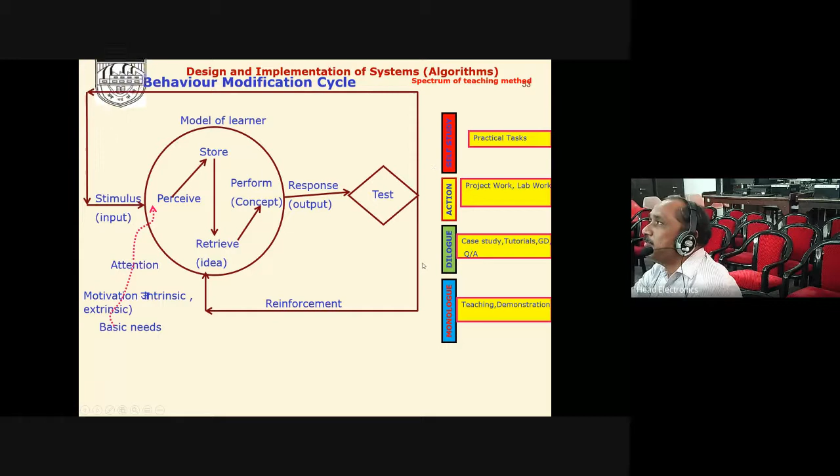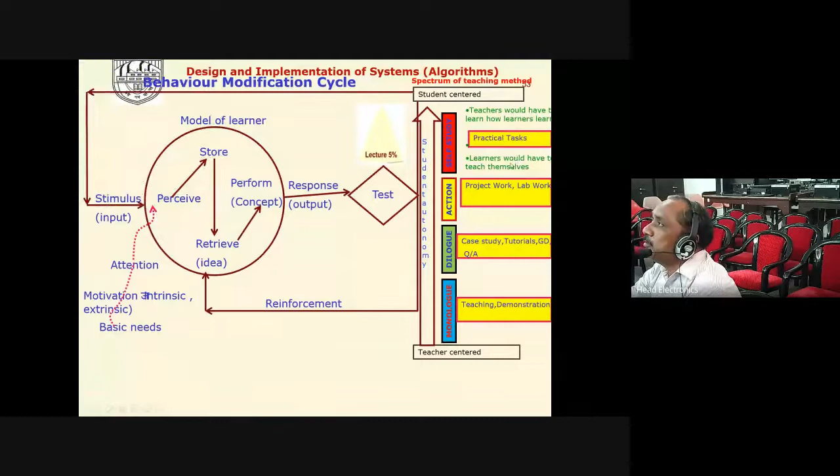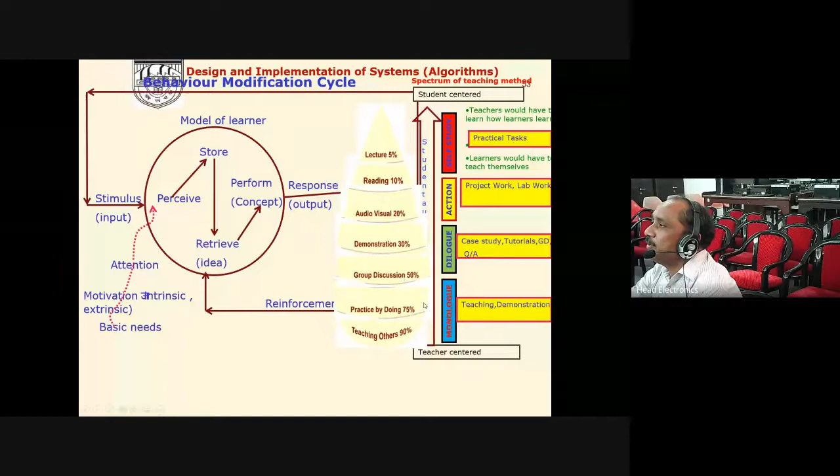One is the monologue, dialogue, action, and self study, with different types of processing, transferring knowledge from teacher-centered to student-centered, or from teachers to learners. Basically, in this teaching learning process, a teacher has to learn how the learners learn, and learners have to teach themselves. What is the percentage of learning? Lecture is 5%, reading 10%, audio visual 20, demonstration 30, group discussion 50, practice by doing 75, and teaching others 90%. These are the motives why we are moving towards the teaching learning process.

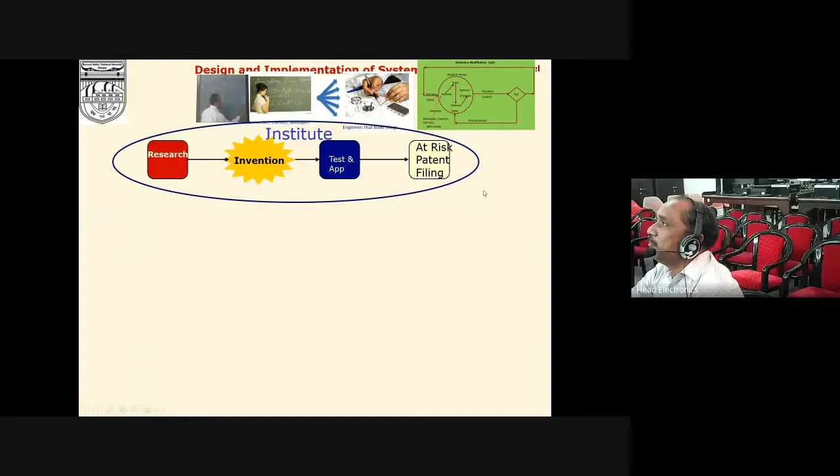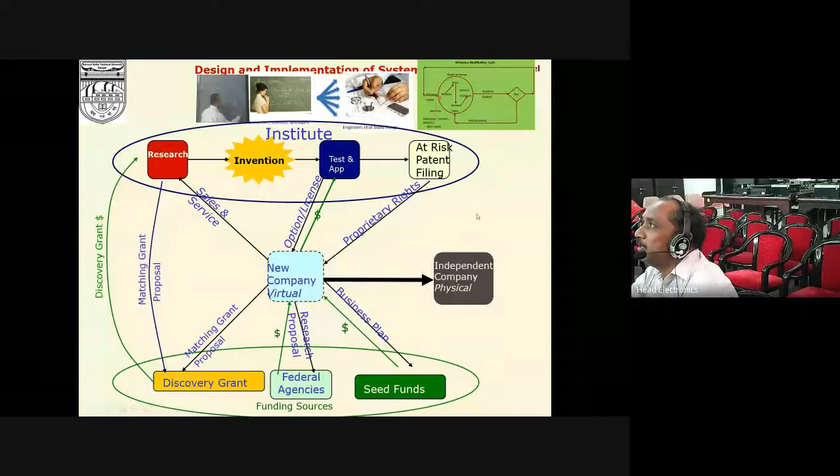If we are very serious about the teaching learning process, naturally by doing research there will be inventions or innovative ideas, and we can test and apply them, then file a patent, and virtually you can make your own company. Then, making a business plan, you can send the proposal to different organizations. After getting approval, you can start your independent company, enjoy the company, and serve society. So this is about the concepts.